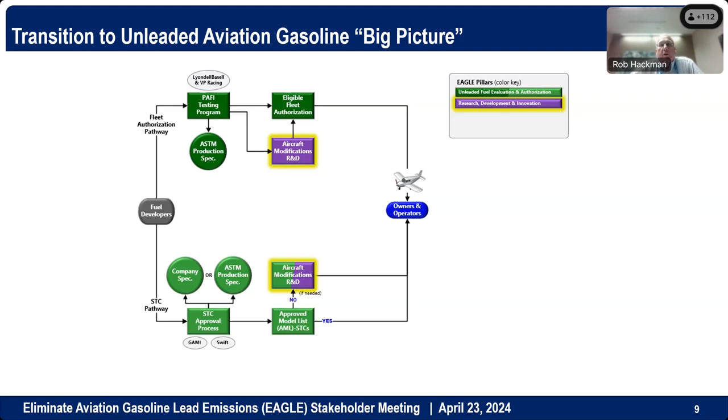Both pathways lead to effectively an authorization for the fuel to be used in the aircraft. The next pillar, the research and development pillar, is in place, and you'll hear an update on this, to utilize any particular technologies or other systems in place to help aircraft make the transition that may need additional resources in order to transition, may need something other than the actual fuel itself to make the transition. So that research pillar is in place to support those, and you'll hear an update on that. Next slide.

So the distribution pillar, supply and distribution pillar, looks at the production, distribution onto the airport, into the wing, and beyond installation of the actual approvals, and is working to provide information to folks that are in the program today with respect to current supply and distribution of our existing fuel, so that can be considered as we look at the future of new fuels. That's not to say that new fuels will follow the exact same supply and distribution. They may find others, but understanding the nature of our fuels today is important for understanding how these fuels come into place.

It's through a major portion of this activity supports what Kurt was referring to, which is the commercial decisions of the fuel being implemented out into the field. This is where many of the businesses will need to make their decisions with regards to aircraft manufacturers, FBOs, fixed-base operators, flight schools, and the like. So this supports more than just the technical and regulatory portion, but the commercial and business discussions that need to take place. This is also important for ensuring that our fuel gets to the wing of the aircraft safe, dry, and on specification. Next slide, please.

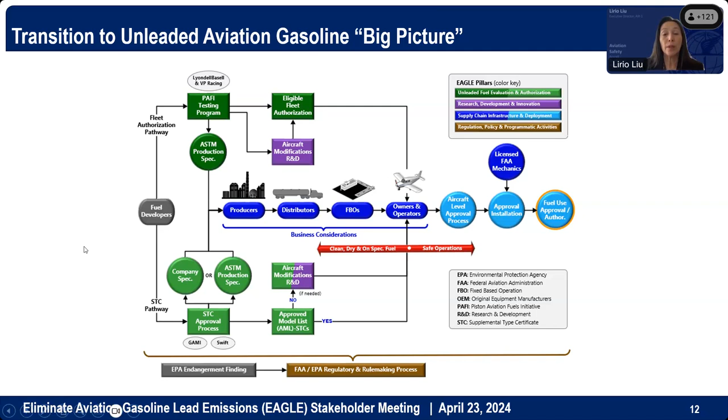GAMI has submitted a flight test report for this project based on flight testing that was conducted using the Robinson helicopter. GAMI reported last week that Vitol Aviation has produced an initial production tank of approximately 1.2 million gallons of G100UL, which is being conformed to the G100UL avgas specification as of April 10th. GAMI and Vitol announced at Sun 'n Fun that the G100UL is now available for sale.

Another fuel going through the STC program is Swift Fuel. Swift has submitted all of their approved and conforming test results for an initial STC for the use of their 100R to the FAA. The FAA is currently in the process of reviewing that data. Upon approval of the initial STC, Swift Fuel plans to broadly expand the approval through an approved model list later this year. Swift Fuel is also working with ASTM International to obtain an industry consensus standard for the 100R fuel. So that's the status of the 4 fuels we have right now.

Thank you, Larry. Just as a reminder for everyone, if you have any questions, please feel free to pose them in the chat, and we will get to them at the end of our session. As you can see, there's a lot of work going on to ensure that we have a safe replacement and transition for unleaded fuel in the near future.

Now let's turn to the first pillar update, which will be on fuel evaluation and authorization, and presented by Tim Owen. Tim.

So the basic objectives of the pillar for unleaded fuel and evaluation authorization are presented here, which is complete the testing, identify at least one unleaded fuel acceptable for widespread use, institutionalize the fleet authorization process for unleaded fuels, and again, the education, training, awareness, and outreach. And again, the key considerations are fuel quality, safety, fleet impact, mitigations.

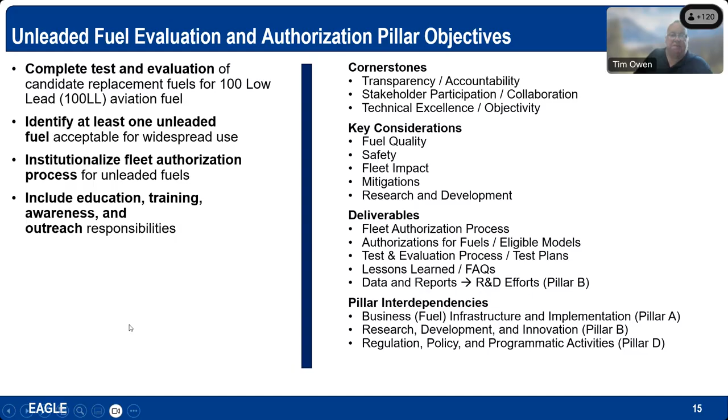So we divide the PAFI program, currently divided into 4 or 5 gates. The first 3 gates are what we called pre-screening or initial testing. That was an outcome of lessons learned from the initial PAFI program, where fuels made it into the program and failed on the first durability test. So as a lesson learned, it was a requirement to get through gate 3 to pass that, the mini durability test.

In addition, there's a minimum subset of materials compatibility, engine performance and fuel properties, comparison of the specification to 100 low lead D910, and then performance and detonation testing. Both the LyondellBasell VP Racing UL100E and the Phillips 66 Afton Chemical 100M were in that process for approximately 2.5 years, which was an R&D iterative process trying to get all of those boxes checked.

As Lirio mentioned, the Afton Phillips 100M did not complete the mini durability test successfully. The LyondellBasell VP Racing UL100E did pass that test on a TSIO 550K in November of last year. At that point, we proceeded into full-scale testing, which heads toward gate 4, which is the completion of all that testing and provisions for performing the fleet authorization and the ASTM specification.

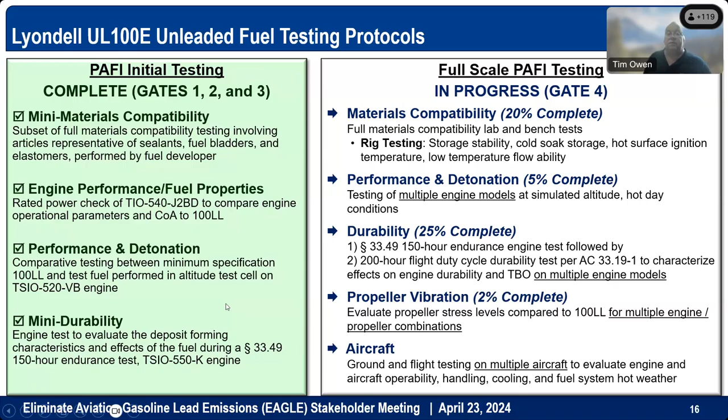So those are laid out on this chart, those 5 elements. Detonation and performance shows the engine models that will be tested. We're currently testing a Continental TSIO 520 VB. We will also retest a Lycoming TIO 540 J2B, Lycoming IO540 K1A5, Continental IO550D, Continental O470U, and a Pratt & Whitney large radial DC-3 engine, an R1830 S1C3G. We're about 30% done on the initial test in the full scale.

On the durability and performance side, we've completed the testing on the Continental TSIO 550K. That engine was set up to the Cirrus SR22T fuel flows and ratings, and from all quick look assessment, a very successful test. We still have to tear down the engine and perform the measurements. We will additionally test the other engines shown here, the IO360C1F radial, the W670-6N, and an A1A.

The aircraft testing protocol consists of a helicopter, a Robinson R-44-2, a turbocharged Cirrus SR-22T, Beechcraft Bonanza, a Cessna 206, twin, a Cessna 402C, the Piper Malibu PA-46-350, a Cessna 182Q, which is a carbureted engine, and a radial-powered aircraft, a T-6 Harvard 4.

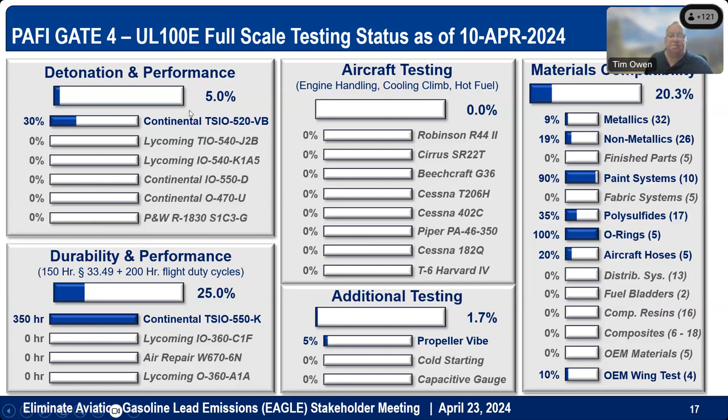So to that point, it's going to take about 50,000 gallons of fuel. The little drums you see there have been sent already to those locations to perform that materials compatibility OEM testing and a little bit of the propeller vibration testing. But that's where the fuel will be headed, we believe.

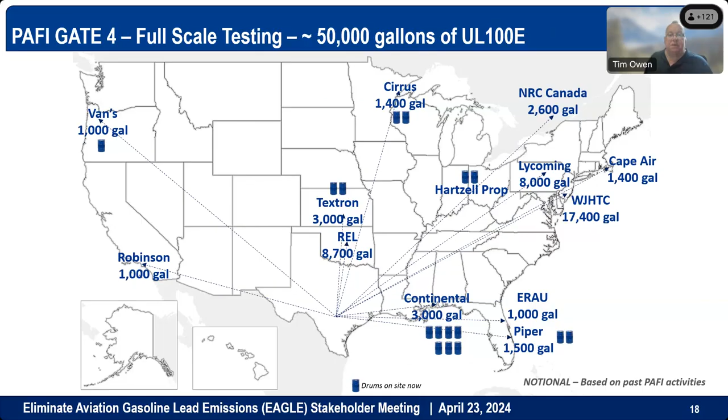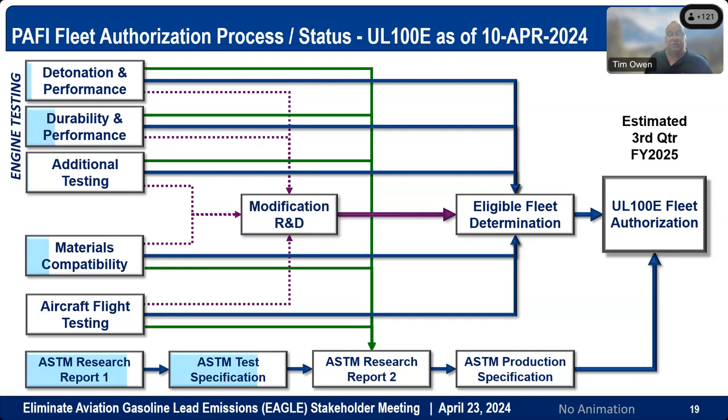And with the progress being made on the deployment side, this is a very important next step. Ryan Manor, could you please take us through your update here? Sure, thanks Eric. Next slide.

So this is the pillar foundation slide you've probably seen before, it's available on the website. At a high level, the objectives are to support, facilitate, and evaluate the various aspects of the transition to unleaded avgas. We're taking a systematic, data-driven, and collaborative approach, ultimately helping to ensure that it's a safe transition in terms of aircraft operations and fuel quality throughout the transition.

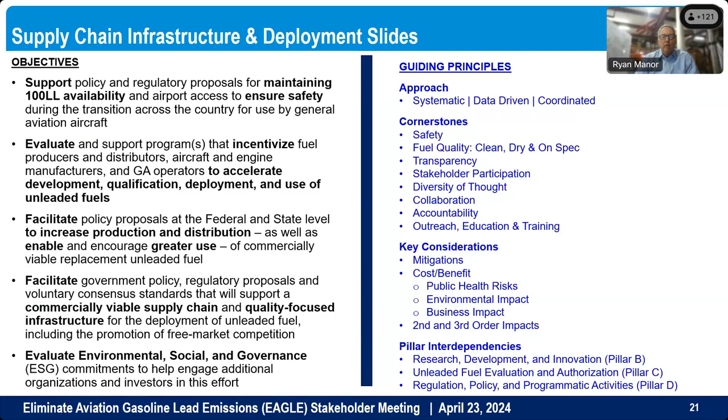Next slide. So I'm going to use the slide that Rob went through as a backdrop and focus on the supply chain infrastructure and deployment, again within the context of the big picture. The scope is from production to aircraft level approval.

It's intended to help, as others have mentioned, inform the regulatory and policy proposals, the FAA, EPA rulemaking, and a big one is stakeholder decisions on when to transition to unleaded fuel and to which fuel. And finally, support the other pillars.

We're doing this through stakeholder outreach. As an example, we have weekly team meetings with producers, distributors, FBOs, and aircraft operators and owners, and plan to add a team for the FAA licensed mechanics.

So again, weekly team meetings with those teams to understand the challenges, opportunities, and help inform the content development needed for the education and awareness. We've also surveyed the distributors and had direct meetings with them to better understand their challenges, and plan to do the same for producers in the near future.

We've also started outreach—Kurt mentioned this, I think it's been ongoing—but I'm doing more direct outreach to stakeholders in Alaska and Hawaii to better understand their unique challenges and needs.

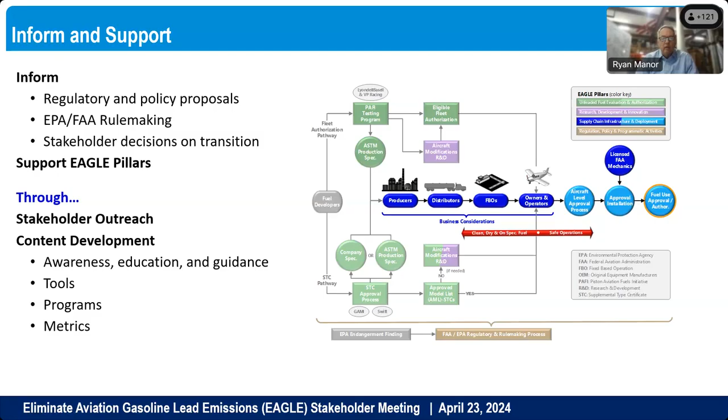Just to highlight some of the key challenges—you're going to see these in later slides relative to each of the stakeholders—big ones: maintaining 100 low lead during the transition. Avgas is the only remaining fuel that uses lead, and there's only one lead producer today, so there's obviously pressure on them to continue to produce that. And competing high octane fuels have not been tested for compatibility with one another. This may be done at some point in the future, but there's no guarantee of success. So that's a big challenge.

And others have spoken—Kurt, I think you talked about this—but in terms of complexity, this outlines the key parts of the process, and there are many layers underneath this, and many stakeholders that need to be part of this, who make individual decisions in terms of when they transition and into what fuel. And then finally, state and local government action that forces premature transition creates challenges, one of which is maintaining 100 low lead availability. I think we've seen this in California and some other areas.

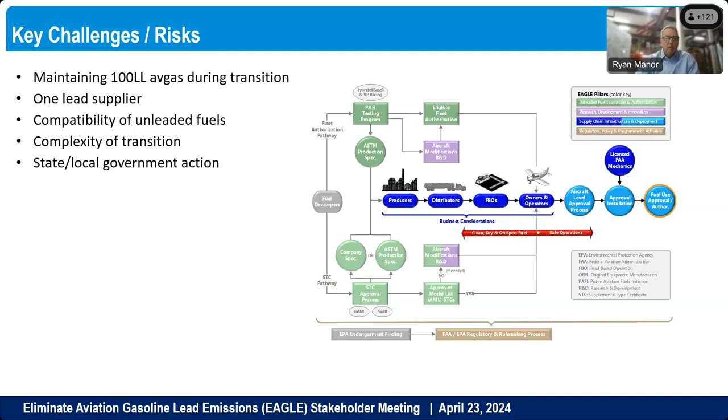So over these next few, I'm going to focus on each of the key stakeholder groups, show a few statistics and some of the challenges, and show you how it fits in the context of the broader supply infrastructure.

These maps on the next few slides, also a little shout out to the website. Eric's going to talk a little bit more at the end, but these maps you're going to see are part of an interactive map that's on the toolkit on the homepage of flyEAGLE.org.

So some statistics: the demand for 100 low lead is about 180 million gallons a year, compared to car gas at about 135 billion. I think that's 750 times the demand for car gas versus avgas. So it's relatively small. There are currently 7 refineries producing 100 low lead, that's 4 companies, 7 locations, compared to about 125 refiners in the U.S. that produce car gas and other fuels.

Also on this map, note the X up at the top there. That indicates a refinery in Minnesota that stopped producing 100 low lead last year. Again, that's one of the key challenges. We hope that kind of thing doesn't continue, but those are independent decisions. Also here, in Indiana, Swift Fuels is blending UL94. And in Baton Rouge, Vitol has announced, as previously discussed here, that they're now producing or making GAMI's G100UL, and it's available for sale.

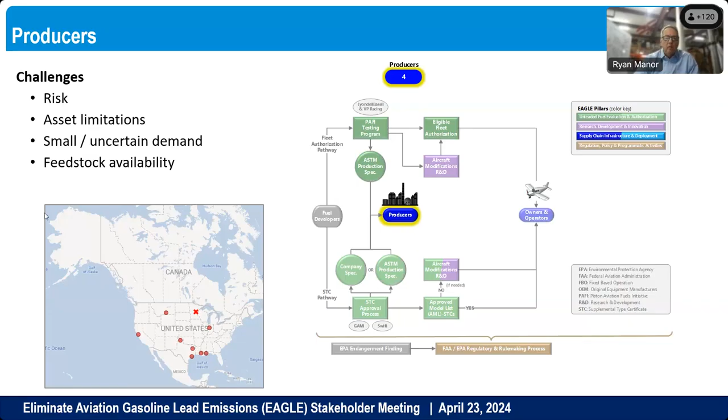Next slide. And you'll see the theme here - the risk is kind of throughout this supply chain. So some statistics here: the blue dots are the terminals, the red dots are the refineries. There's about 15 distributors and about 35 distribution terminals in the U.S.

Product moves by truck, rail, and water. There may not be terminals per se in Alaska and Hawaii, but we're starting to better understand how avgas gets supplied there - it's through ISO containers, and they've got definitely unique challenges that we need to better understand. Again, for context here, there's about 1,300 terminals in the U.S. that distribute car gas and other fuels.

We talked about the risk, indemnification, and insurance coverage, compatibility of the fuels, the competing fuels, and the materials in the distribution system - ensuring there aren't issues with the wetted components in the existing distribution system with any of the new fuels. Supply availability and security - again, small quantities, long distances to cover. As Rob mentioned, these new fuels will likely use similar infrastructure to what's out there today, but it doesn't have to be that way. As an example, on the refinery side, there may be more blending going on than just full refining of the end product at a given refinery, so that's going to probably be unique in this transition. And we talked about the state and local mandates that force premature transition, which obviously creates challenges.

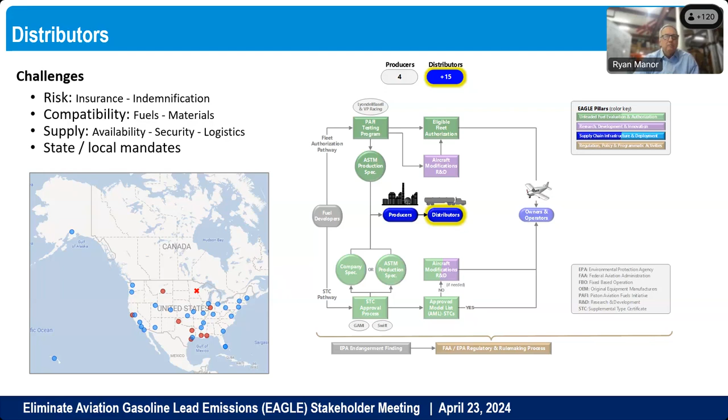Next slide. So FBOs - there's about 1,500 to 3,500 FBOs selling avgas today, 100 low lead. Challenges: low demand, supply availability, infrastructure constraints. Only a small percentage have a second tank for another fuel.

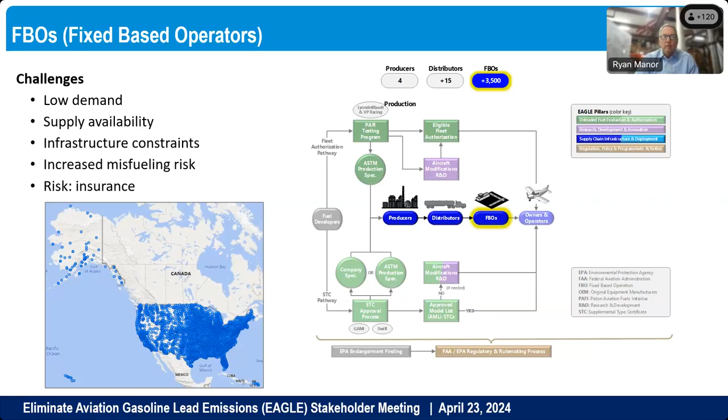And then on the risk side, misfueling risk from having multiple grades of avgas. Today there's just one, so when you introduce additional grades, that creates additional risk. And then again, insurance coverage as well. Next slide.

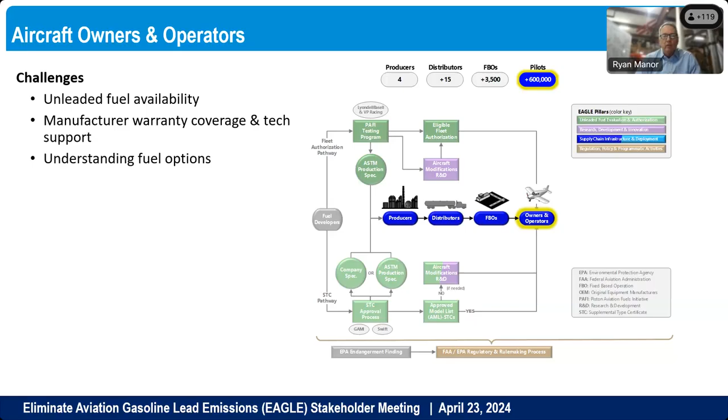Those will all be things that will have to be considered as people decide when to transition into what fuel. Next slide.

So in the beginning, as I thought about this and the title of the pillar, supply chain infrastructure, I really thought about it from production to the wing of the aircraft. Over the last several months, I've expanded that to include the aircraft level approval process, which is over on the right there. That's going to be a key part of this because you can have a fuel approved and authorized to use in an aircraft, but until each owner operator takes action to effectively get legal to use that fuel, you're not done yet. So I've expanded this a little bit.

There's over 220,000 piston engine aircraft in the fleet, and 250,000 FAA certified or licensed mechanics that are all going to play a key role in this. The chart on the lower left is the fleet breakdown between certificated and non-certificated.

You heard others, Paul or Rob, earlier say that the STC applies to all certificated aircraft depending on the fuel. Non-certificated aircraft, which would be experimental or light sport aircraft, have to use a different process. It doesn't mean they can't use the fuel, it just means the STC doesn't apply because they're not certificated. So that's the point of that distinction. Next slide.

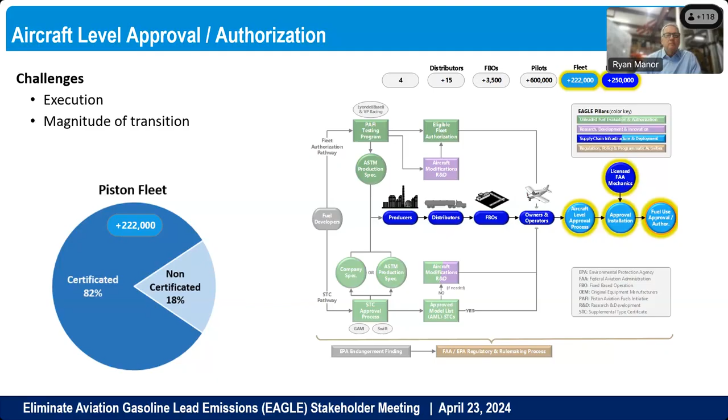Fuel quality and safety is paramount. Again, Rob mentioned this, but ensuring the fuel is clean, dry, and on specification throughout the supply chain and into the wing, and then maintaining safe aircraft operations and mitigating misfueling risk are obviously very key to a successful transition. Next slide.

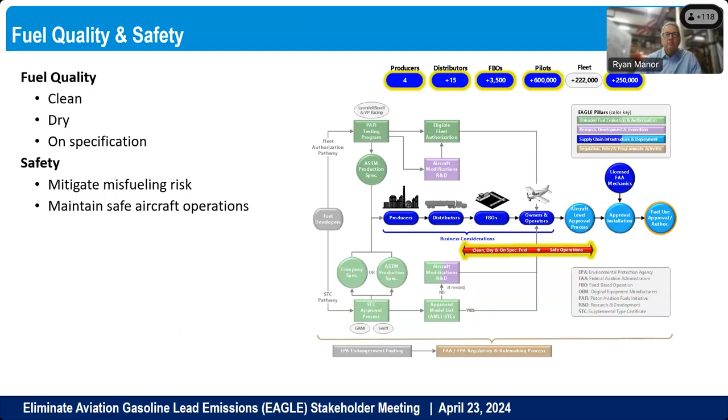So this one, it's the last slide, market acceptance, and Kurt spoke to this, but you can have a fuel authorized for a number of aircraft in the fleet. But this is, I think, the softer side where each of these stakeholders, the pilots, FBOs, distributors, and producers, have to make independent business decisions about when to transition into what fuel. The factors talked about in previous slides and highlighted here are going to be the backdrop of how they make those decisions. I won't go over those again, but there's a lot in this, and a lot of players and stakeholders that have to make those decisions.

To wrap it up, the focus area I'm working on is to help inform that decision with information so that they can make the best decision with the best information available. And that's it. So Eric, I'll pass it back to you.

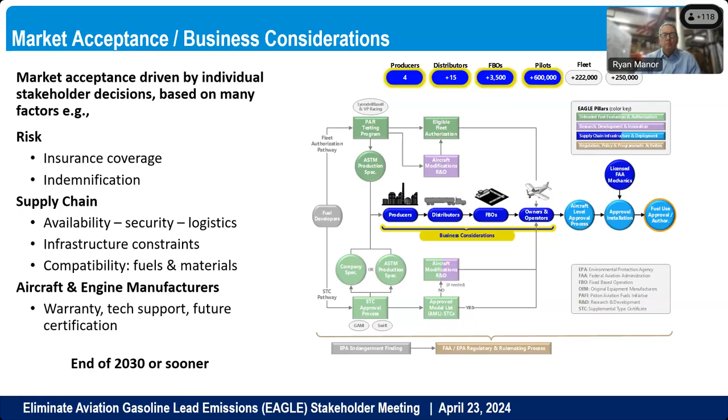Okay, thank you, Ryan. Our next pillar update will be on research, development, and innovation, which is foundational to the work at Eagle. Jennifer Miller, could you please take us through your pillar update?

Sure. Good afternoon. The R&D pillar exists to mitigate impacts on the fleet by applying existing or novel technical solutions. At this point, primarily, we expect those challenges to be octane margin and material compatibility. The cornerstones of our activity are based upon stakeholder participation and a thorough, methodical evaluation of candidate fuels against the existing fleet's constraints. Safety is our number one priority, and we want to efficiently leverage existing technologies and certification pathways. Our deliverables further include installation designs, ICAs, and jumping those regulatory hurdles to implementation. And we will work very closely with the other three pillars to achieve our goals.

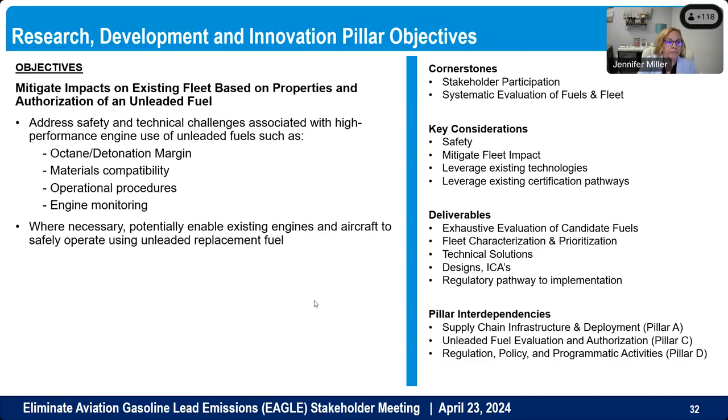Next. You heard Ryan speak about the fleet registry. The FAA fleet registry is a tool foundational to the R&D objectives. A deep dive into the registry gives us over 222,000 entries, of which only about 80% are certificated. The rest are made up of experimental, special permit, or other oddball categories. We have 146 engine manufacturers, over 3,800 airframe manufacturers,

1,785 certificated engine models, over 7,000 aircraft models. It's probably intuitive that the top three engine manufacturers are Lycoming, Continental, and Rotax, but there are 143 engine manufacturers accounting for less than 9% of that fleet. This slide exists to illustrate the complexity of the task before us. We're going to use this catalog to rack and stack the demographics of the fleet so that we can prioritize the work ahead of us.

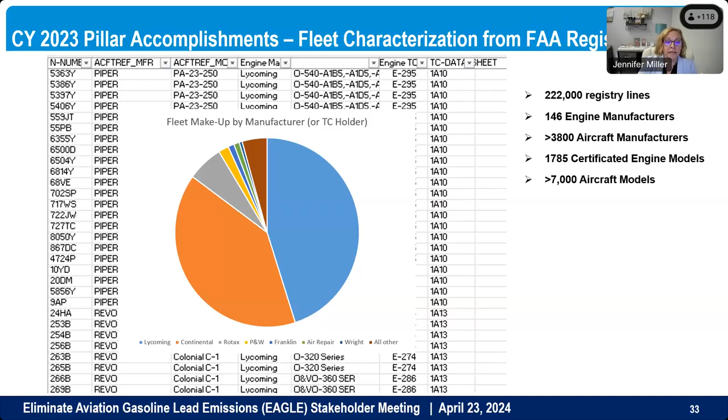Categories such as geographic location of the fleet, vintage - and by vintage, I'm not talking about warbirds, I'm referring to materials or primitive instrumentation - and application, which parts of the fleet serve remote populations, which perform military, safety, or security functions, of which we might want to prioritize the development and certification of our technical solutions. Next slide.

We can also characterize the fleet from what we know about engines. If you imagine this graphic of a radial engine as a pie chart of the fleet, we already know roughly two-thirds of the fleet will be transparent in this transition and should not be impacted by a transition to the candidate fuels. But another tool in our belt is a complex model that classifies octane demand of an engine with more granularity based on what we know about engines. This is a powerful tool which, along with additional planned testing, will help us whittle away further at which portion of the fleet will not require accommodation.

And once we identify those engines, what remains is those aircraft which our R&D activities need to address. We expect portions of the fleet may be impacted by material incompatibility with candidate fuels, density which varies from 100 low lead, or other issues which have yet to be identified.

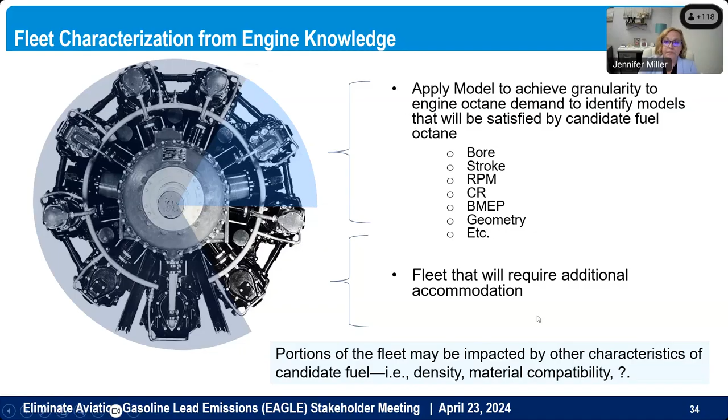Next slide. So in 2024, we will flesh out a candidate fuels matrix between what we know from the specifications, what the STC holders will share, and what the Tech Center has yet to discover. We'll put this fuels matrix against the well-conditioned fleet demographic picture so we can positively identify portions of the fleet that will be impacted by the candidate fuels, prioritize implementation of the technologies given the potential sheer volume of design, testing, and certification efforts, and then roll out those technologies.

Technologies we're considering include, but aren't limited to, electronic ignition and ignition timing changes. We know timing can be changed to provide detonation margin, but then there's a power trade-off. Engine monitoring or other instrumentation can be used to closely observe engine behavior and respond in real time with revised operating procedures, and other technologies that aren't foreign to the industry.

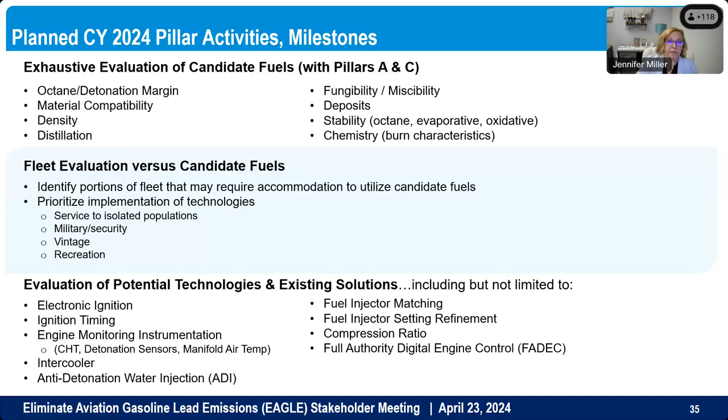As I mentioned, the pillars are collaborating closely with each other, and this is a good segue into my next topic, as Lycoming has worked closely with the FAA regarding another recent challenge we've experienced in our transition to an unleaded fuel solution, and that's valve seat recession at UND. Next slide.

In June 2023, the University of North Dakota at Grand Forks switched to UL94 supplied by Swift, and that UL94 conformed to ASTM D7547. This is for those of you in the audience who aren't already familiar with this topic. I know a lot of you are. By August 2023, the first case of valve seat recession had presented itself.

By low compression. They have in their fleet 14 Seminoles, 76 Archers, and 5 R-44s. All of those aircraft have parallel head, standard 8.5-to-1 compression engines that have plenty of detonation margin on UL94. All told, at the end of the day, VSR was experienced in roughly 28% of the engines in the fleet. VSR was only found in those engines after 400 hours minimum on the engines in which it was seen.

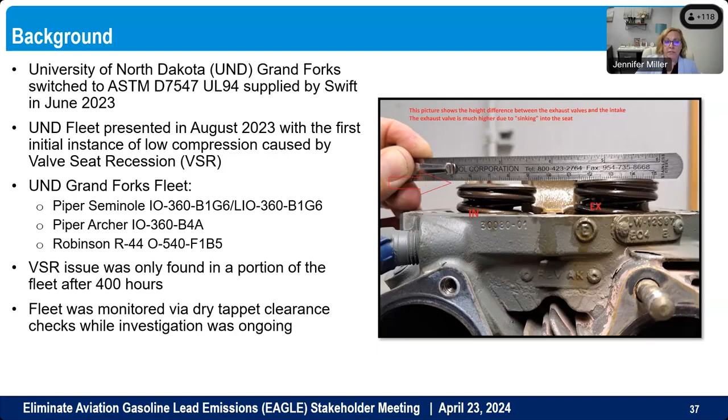We did monitor the fleet via dry tappet clearance, which is not how you measure VSR, but it was a way for us to monitor the fleet non-invasively, in addition to compression checks. In October, UND switched back to 100 low lead. Next slide.

A little primer on valve seat recession for those in the audience who are not engine people. On the left is a cutaway of a cylinder head with an intake valve on the left and an exhaust valve on the right. In this illustration, both valves are closed and resting seated in the valve seats. In this illustration, the valve seats are bronze. In the upper right, you can see an open exhaust valve.

VSR occurs when the hammering of the valve on the seat during operation results in material displacement and deformation on the seat, resulting in a condition where the valve and seat interfaces fail to seal.

We were really put back on our heels with this, given the decades of Petersen STCs and years of fielded UL91 and UL94 experience—hundreds of thousands of flight hours. We have no reason to believe this is a safety of flight issue for other operators. Lycoming does not have a history of valve seat recession.

When this was first reported, Lycoming quickly composed a list of primary and secondary hypotheses, also knowing full well that the circumstance could simply be the perfect storm of small contributions. While clearly the principal cause is that in the absence of lead, there is nothing in the fuel to provide a cushion between the seat and the valve, there are other aggravating factors at play here.

Yet our investigation has revealed no smoking guns. The engines and cylinders are conforming, the valve seats and timing are conforming, the fuel was conforming to the spec and not contaminated. I know there has been a tremendous amount of speculation in the press regarding UND's operation, and I can confirm that leaning procedures were followed in accordance with the respective pilots' operating handbooks for Archers and Seminoles, that is full rich for takeoff, climb, and descent, while leaning for best economy during cruise.

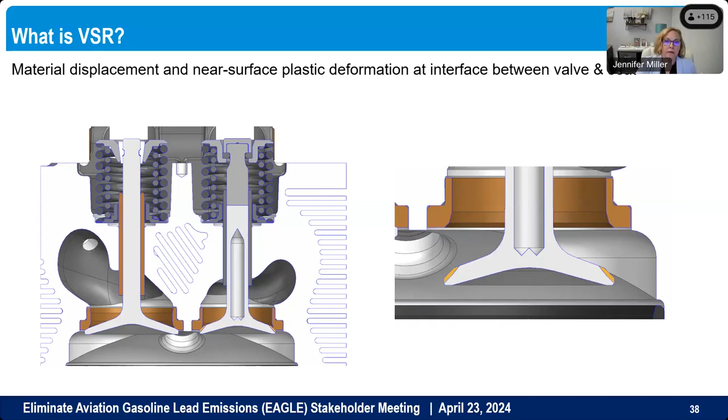Currently, our leading hypothesis is related to aromatic content in the fuel and the thermal impact on the valve seat. Lycoming and the FAA are pursuing aromatic sensitivity testing to validate or invalidate that theory. I want to stress that this is just a hypothesis and not all parties are in agreement.

What we do know is that this is isolated to UND. We do not believe this is a safety of flight issue because it is discoverable. The FAA, UND, Lycoming, and Swift are working closely together with other members of the industry to isolate the cause. We also continue to stay in close contact with other users of UL94 at non-UND locations while we perform our testing. The bottom line is that any learning now, early in our transition process, whether we feel otherwise or not, is a gift. Because the sooner we know, the sooner we can respond, and that will inform our path forward in the transition to an unleaded future.

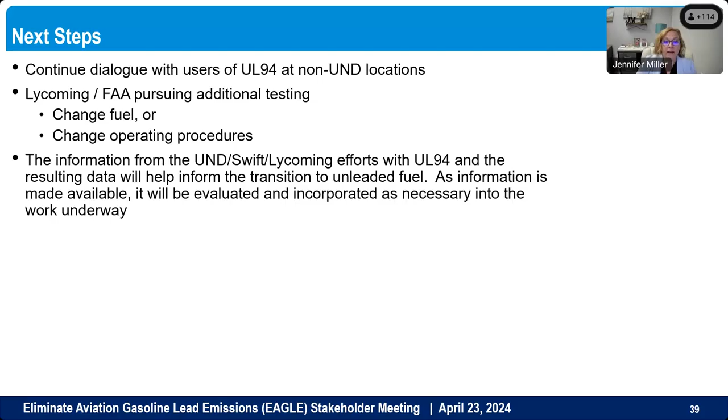Our fourth pillar update will cover regulation, policy, and programmatic activities. Last October, the EPA issued an endangerment finding which advanced the process for rulemaking and other regulatory steps by the FAA. Ralph Ivanelli, would you please update us on where we are in the regulatory process?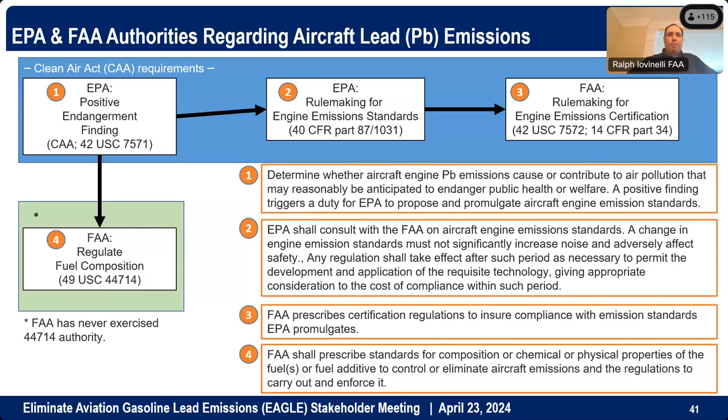Hi, everybody. Will Reinhardt here with the FAA Office of Airports. Really just wanted to briefly revisit the fact that we continue to emphasize the constructive actions that airports, service providers, and airport users can take to support the transition to an unleaded future. In pretty much every forum, we always re-emphasize these items: working to offer unleaded fuel types while maintaining 100 low lead, increasing distance between run-up locations and people on and off airport, minimizing engine idle time and run-up time, and promoting airport and pilot awareness.

In addition to that, we also really put an asterisk next to the importance of planning for a transition. So airports that are conducting a master plan, scoping a master plan, or even thinking about a master plan, we're really encouraging folks to plan for a predictable, orderly, and safe transition. So plan for that, include it in your process, and I think we'll all be better off.

On the topic of things we emphasize, I want to note there are many examples across the U.S. where airports are exemplifying constructive actions. We're seeing things ranging from procuring new tanks to store and dispense unleaded, leveraging existing spare tanks, purchasing fuel trucks to bridge a gap in infrastructure, and municipalities, cities, counties, and governmental organizations working to find creative paths to fund purchase of STCs at a given airport.

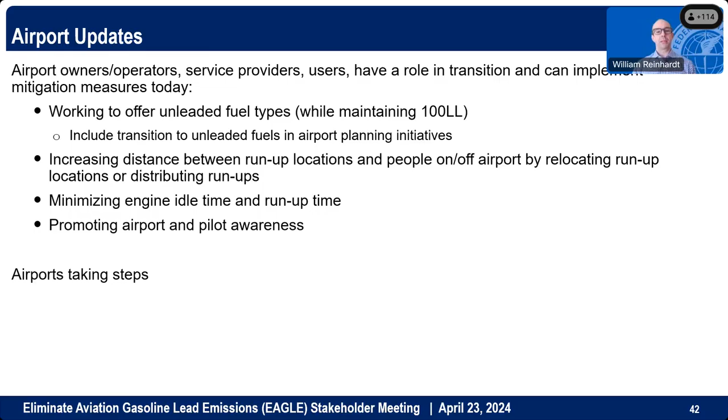And of course, planning for a safe and orderly transition. We have examples of airports doing that and really working hard to find a path forward. That's pretty much all I've got. Pass it back to Maria.

Actually, it's Eric. Thank you, Eric, sorry. Ralph. No problem. Thank you, Ralph and Will.

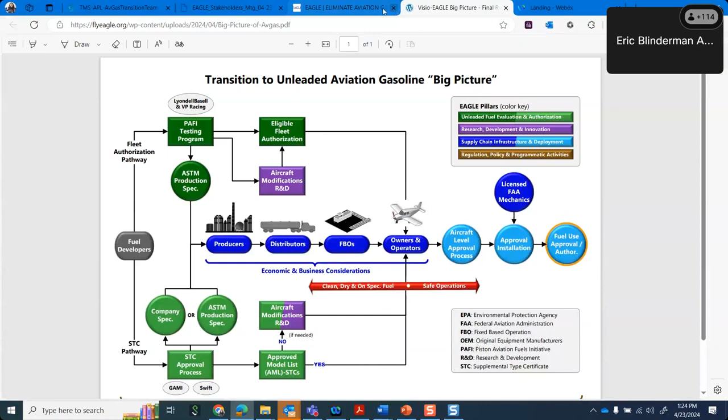Our final update for today is to address our updated website, flyEAGLE.org. We've made enhancements to the website so that it's easier for you to find the latest information and news from Eagle, as well as other important information regarding the path forward to our safe and smart unleaded transition. The website now includes stakeholder resources and an interactive toolkit. We invite you to visit the updated website and use it as a valuable resource going forward, and as always, we invite your feedback.

Some of the things you'll see within the interactive toolkit: airport and logistics maps, guidance on transitioning a flight school to unleaded gas, and a big picture slide that provides an overview of all the players involved in the full transition. You'll be able to see some media coverage focused on our transition, connect with us on X, also known to some still as Twitter, and you'll have the ability to join the Eagle mailing list, stakeholder list, and register for future stakeholder meetings.